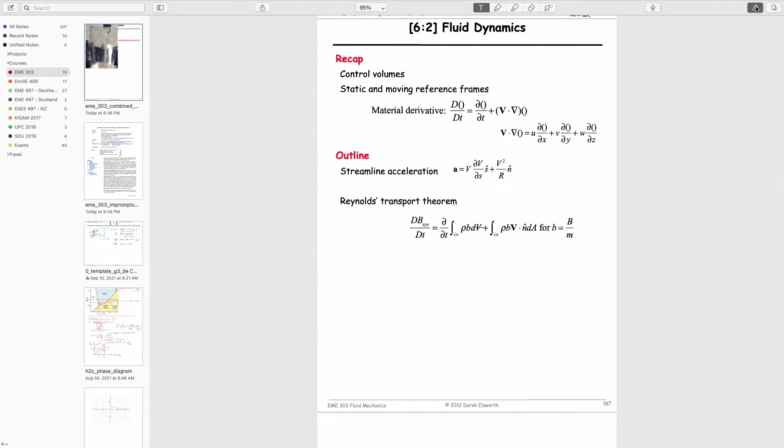Remember, we're talking about control volumes or conservation laws for mass, momentum, and energy, kinetic energy, in successive weeks. We'll look at different ways we can evaluate how long it takes to fill a glass, basically. Quite rudimentary, but it can be as complicated as I want to make it, and we'll make it a bit complicated because the principles we use for this we can apply also to conservation of momentum and conservation of energy. Conservation of momentum is important for things like wind turbines - you're transferring momentum from the air to rotational motion of the blade on a spindle and transforming it into energy. So it's important for machines, transfer of momentum. That's kind of where we're going. So enough chatting, let's get down to what we want to talk about today.

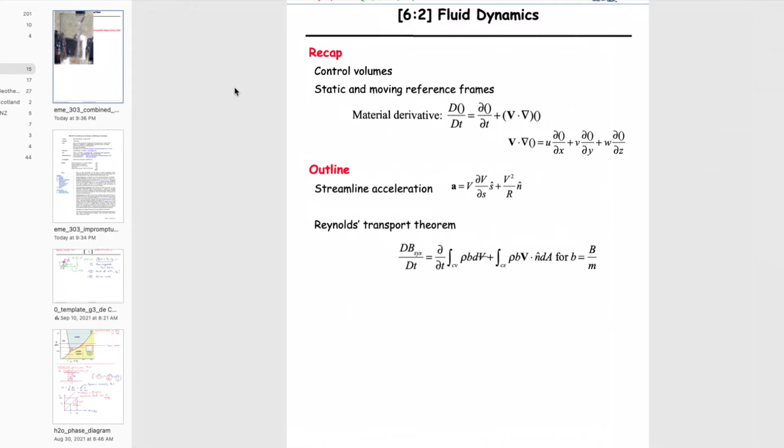We'll start with our usual discussion of what we've come from. So what have we talked about? You remember we talked about control volumes - we'll talk about those a little later today, so I won't reintroduce that now. But I guess the most important thing we talked about was static and moving reference frames.

I think the background for that is just that we can write Newton's law, F equals m dv/dt, where v is for velocity, not volume. We can write that, by splitting this out as we found last time, as rate of change of velocity with time, plus rate of change of velocity with x multiplied by dx by dt. This last term, if we write it together, is velocity Vx times dv/dx, which is actually the same - you can prove it yourself - as a half v squared over dx. These are exactly the same as each other.

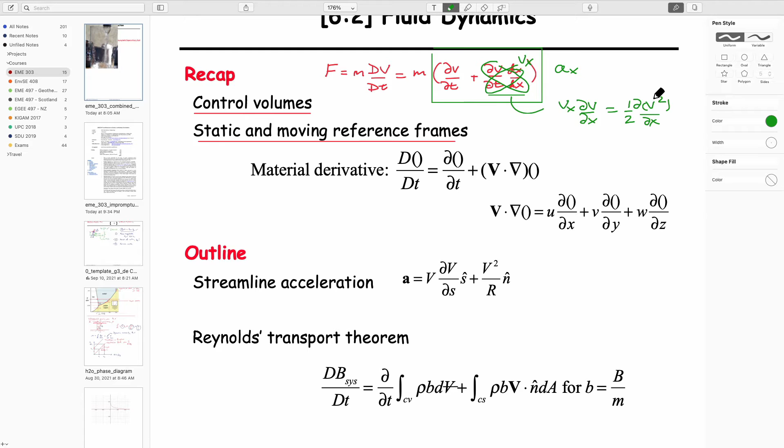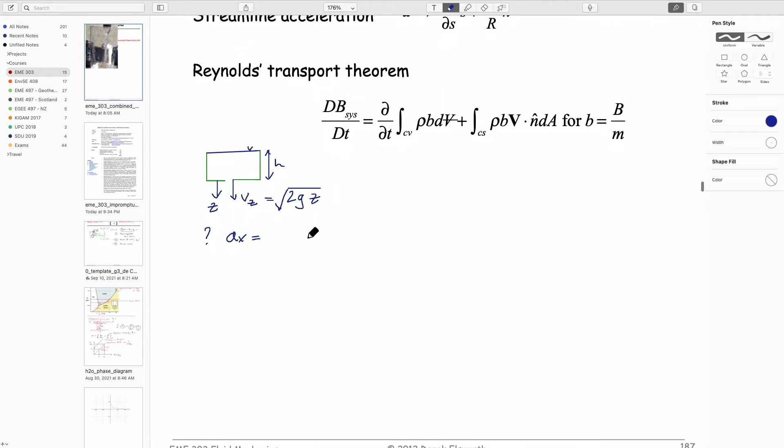But the best way to illustrate this is to think of something we talked about before: the equation of a free jet. We said that if we had water sitting in a tank, the velocity that free jet would come out as, Vz in this case, equals the square root of 2gh - but instead of h, let's call it z and write it downwards, so 2gz is how far we are down. If we look at the acceleration, we can define it exactly this way: velocity in the z direction multiplied by the rate of change of velocity in the z direction with z. That's just going to be square root of 2gz, this first part here.

Multiplied by the derivative of this, which is the square root of 2g, times the derivative of z to the half. And z to the half derivative is a half z to the minus half. So if you multiply these components out, square root 2g times square root 2g equals 2g for these two terms, and square root z times 1 over square root z times a half is just a half. So it's not surprising that it comes out to just be g.

Physically, all this is saying is that if we have a snapshot of this fluid coming out of the bottom, it will speed up as it goes down, just the same as if I drop this. So a packet of fluid behaves no differently than a solid in terms of Newton's law, and it will fall at the rate of gravity. If you were in that packet of fluid, you'd feel weightless, just as if you were flying through the air, like in a skydive. That's an interesting way to think about it.

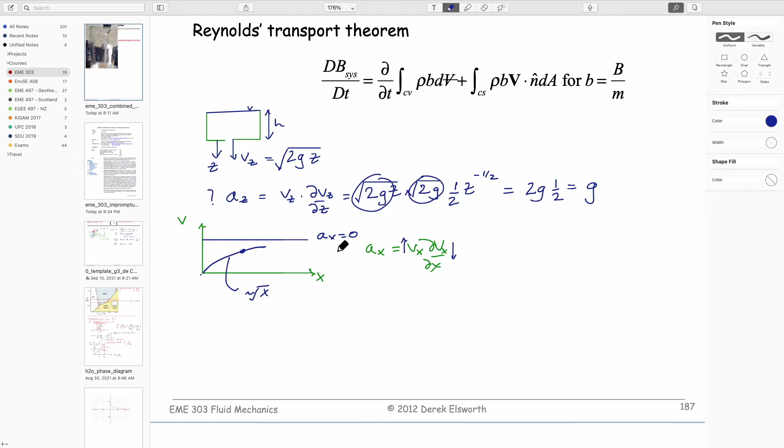So this would be my trajectory as I start off at the wall and go across. If Meredith follows me and does exactly the same change in velocity with time, this would be steady state. The meaning is that this velocity trajectory we see, if you take a snapshot now and take it again in 10 minutes, the curve is still the same. Someone else starting out 10 minutes later, then 20 minutes later, has exactly the same history—that's really the meaning of this substantial derivative. So that's where we're going with this, a recap from last time. It's important to understand that.

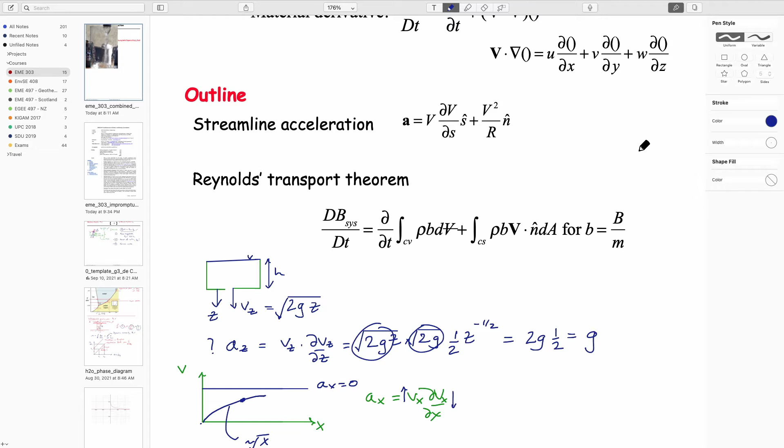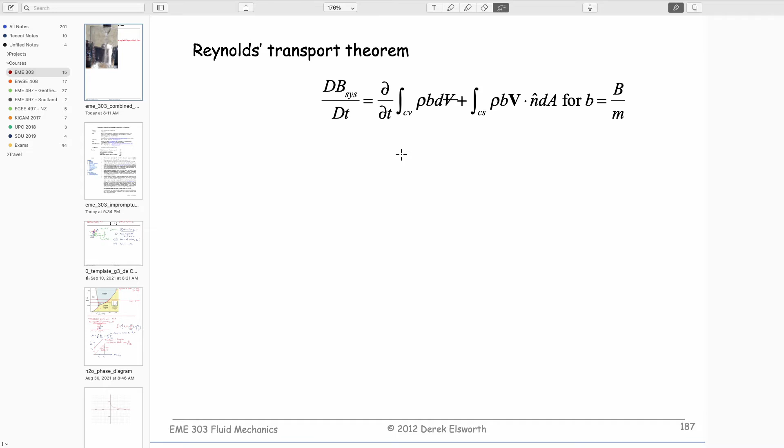The other thing we might want to look at are streamline accelerations. What's the best way to approach those? Let's see what comes out in the movie. So the other thing I'd like to look at today is streamline accelerations. The idea of this is this.

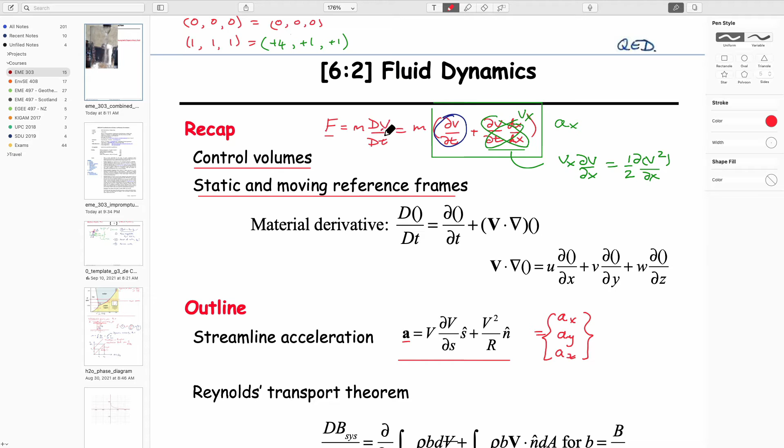If we wrote this out, this would actually be AX, AY, and AZ. You notice that this term is bolded—that means it's a vector, which has these components. We know that when we talk about Newton's law, this is a vector of forces, this is a vector of velocities that makes a vector of accelerations, because there are 3 components. That's the same case here. What exactly does this mean? Well, these terms look a bit familiar, right? This term certainly does.

Because we've talked about Newton's law as being equal to mass times v dv/ds, streamline velocity in this case. And we've also talked about Newton's law for rotation as being mass times v squared over radius. This is velocity, what we've called streamline velocity, I guess.

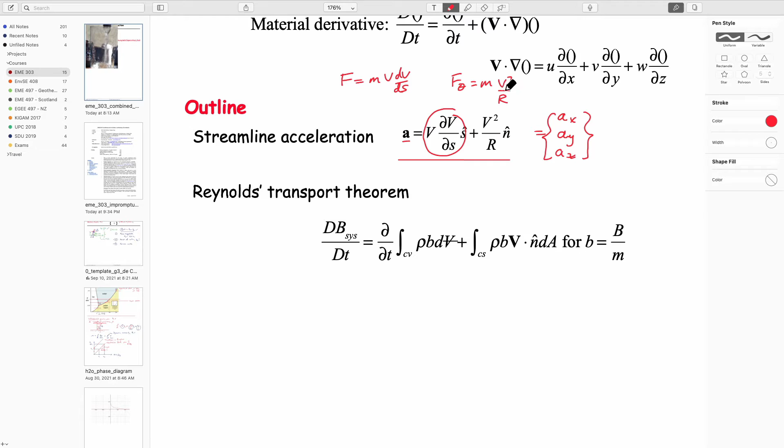Perhaps I should draw a figure - these are the two expressions that exist in Bernoulli for calculations along a streamline and across a streamline. We've talked about them exactly in this term.

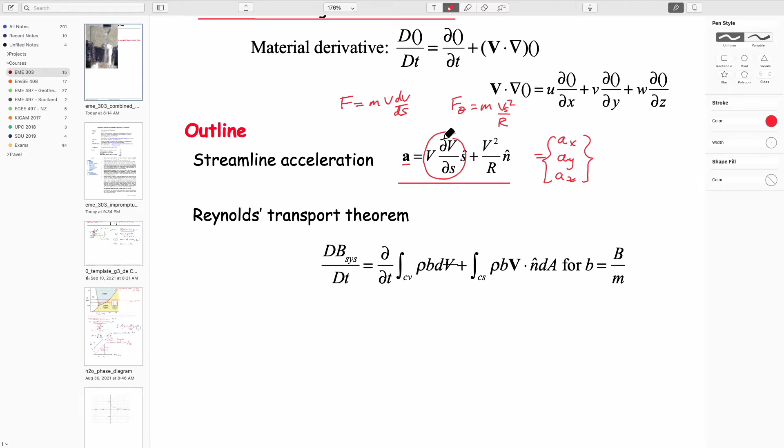So if I draw it here, let's see how well I can draw it. Didn't want to do that, wanted to have a curve. And so we have this idea of this.

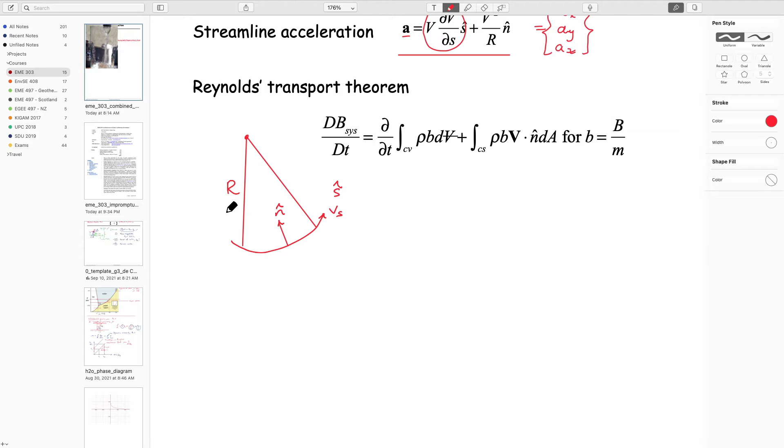So this is velocity along a streamline. This is what we call the streamline direction. This is what we call normal to the direction. Remember that this was acting positively into the center of rotation in the example that we gave. And these are the individual velocities of this system.

So what we can do is, it might be worthwhile thinking about exactly what this means. And what it means is that if we're looking at a particle of fluid that's here, then we can define that behavior as an acceleration in the x direction and an acceleration in the y direction.

The easiest way to do that is to basically draw a diagram that defines these two locations. So it would look something like - let's do it at 45 degrees. So this is our vector along the streamline. This is our vector normal to the streamline.

These are unit vectors. Unit vector means the length of this vector, which is defining the direction, has to be just 1. And so if that vector is 1, we'd like to be able to resolve the components that go along here.

So if this is 1 - actually, it's not 1 yet. Let's make this 1. And then by definition, this one becomes the square root of 1 squared plus 1 squared, so this one becomes the square root of 2. We want this one to be 1, so let's divide it by the square root of 2.

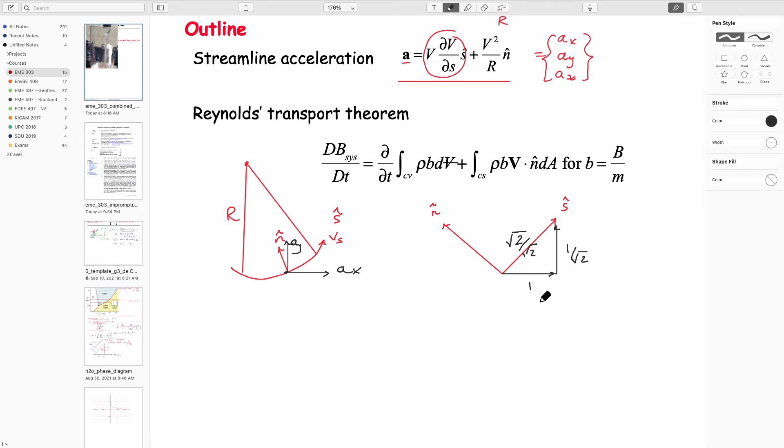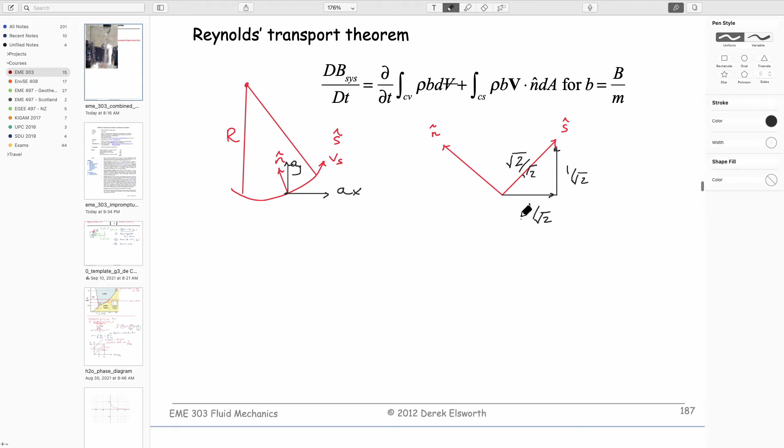So those are the relative lengths that we have that define this system. And so if we want to be able to define these components, we can say that the components - if we write this equation out in longhand, running out of space here - would be ax, ay, az.

Turns out that in this kind of, we talked about this x-y right-hand rule: x, y, z is coming out of the page towards me, towards you as well. There's a rotational one as well, which is a positive one - this is the z-axis, and this is the positive direction of rotation, which is kind of what we have here, just by happenstance.

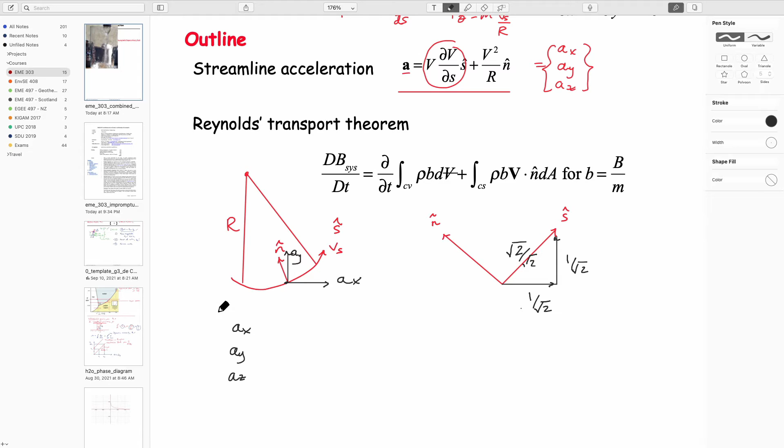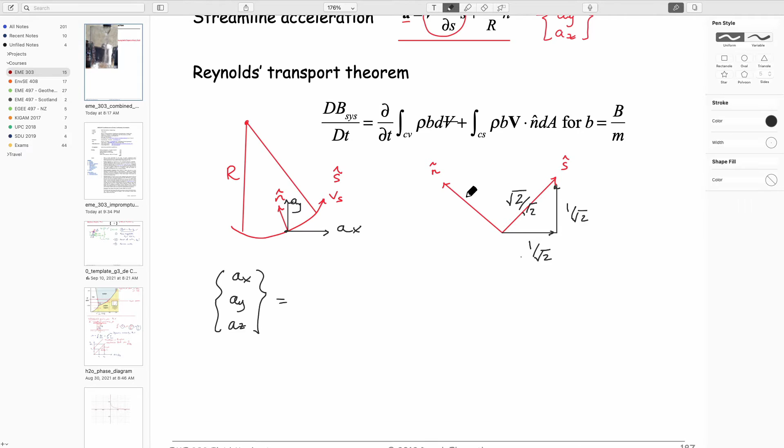If I work on these - I guess I'm spending more time doing this than I wanted to - this would be something like these terms here. So the streamline acceleration would be the velocity along the streamline times the rate of change of velocity along the streamline. So it's that behavior at exactly this point, multiplied through by this unit normal.

And the unit normal is going to be the components of this vector, s, in the ax and ay directions. So s in the x direction would be 1 over the square root of 2. And this would be positive 1 and positive 1. So 1, 1, and 0 is out of the page, so we don't care about that.

The acceleration normal to the streamline resolved into x and y coordinates would be v squared over r, again the streamline velocity, or what we've called before v theta, multiplied by this vector, which is the normal. This vector is this one, and if we do the same to this, it'll have the same dimensions.

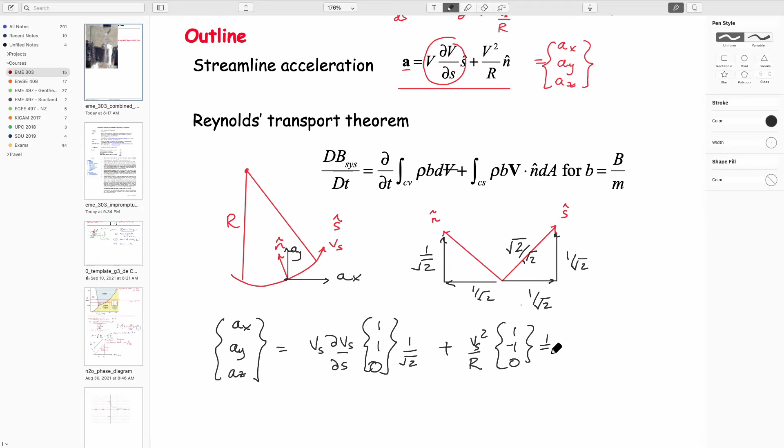This would be the x direction, which is minus 1 over square root 2. And this would be positive 1 over square root 2. So this is x, this is y, and this is 0. And again, multiplied by just 1 over square root 2. So that's physically all this expression means.

It allows us to, in the same way that before, take a velocity field by walking across the room and differentiate that to calculate what my acceleration was, or do it for the free jet, as we did. This is converting a velocity field which is in a streamline configuration into one that's resolved into x and y. That's all we did. And so it might be useful for us to do that at some stage, maybe.

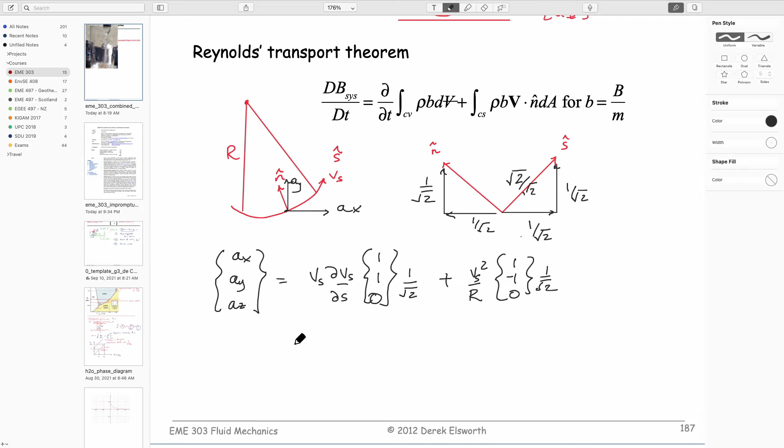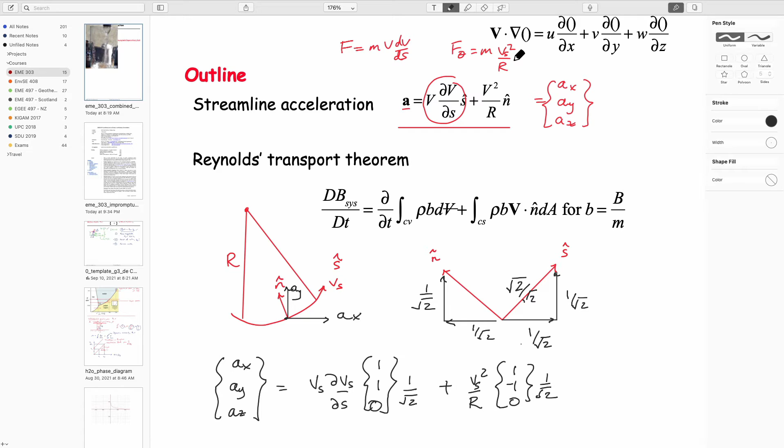So that was something that we are able to convert between coordinate systems. And of course, these two terms, you remember, are part of Newton's second law, linear and rotational. So that's it, that kind of finishes that.

So the next part is to talk about control volumes. We've talked a little bit about that already, and we'll go through a bit of pain that you should try to soak in generally, but won't have to use in full form. A bit of pain, I guess, is to understand exactly what Reynolds transport theorem is. Reynolds transport theorem is this expression here, and I'll try to explain it as straightforwardly as I can. But ultimately what we'll want to do is just use it in some kind of reduced form.

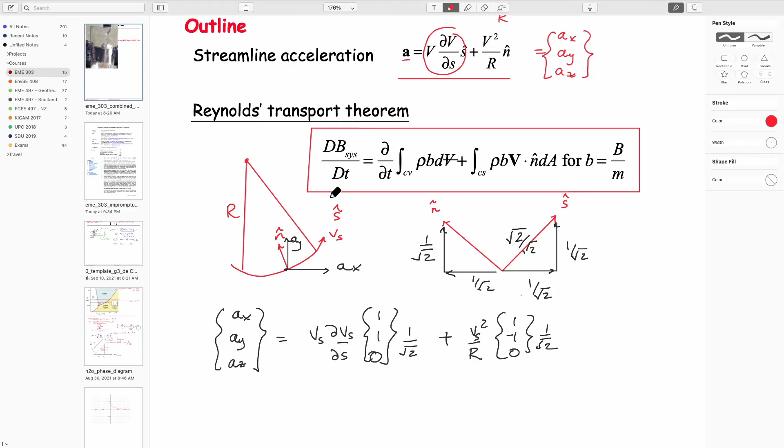But it's useful for us because of two things. One is that we talked before, and I guess I don't know if I have it here. So we've gone through all this. You'll be happy that we've just done this and this and this, and we're now here.

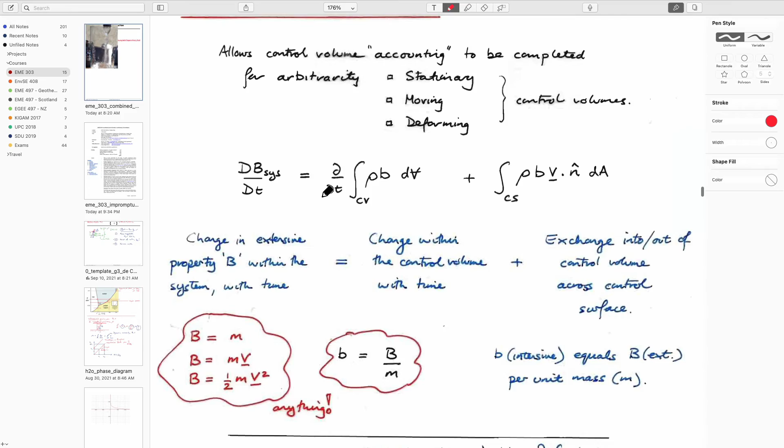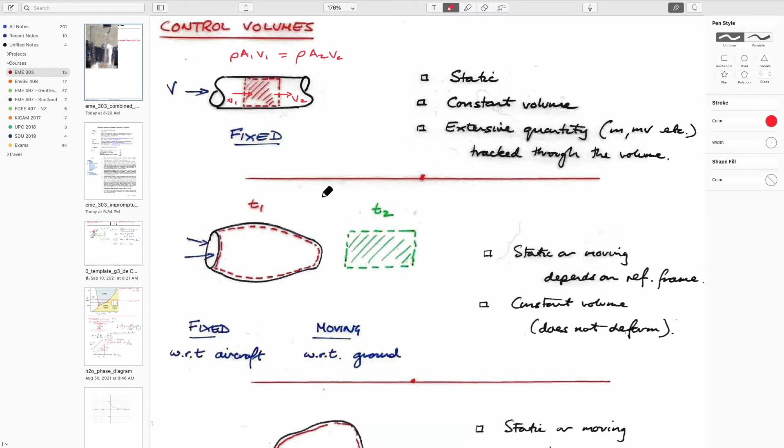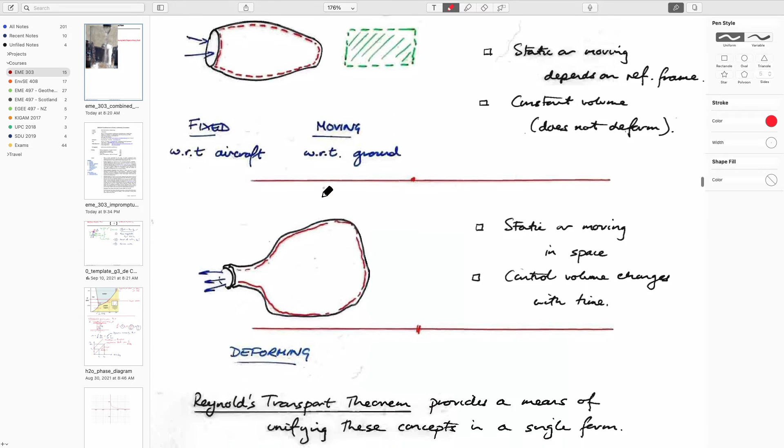So you remember before that we talked about reference frames. The reference frames we talked about were these little figures here: we can either have a static reference frame that doesn't deform, like a portion of a pipe. We could have a moving reference frame that doesn't deform but just translates, like a jet engine. Or we can have a whoopee cushion or a balloon that does both, it moves and it deforms at the same time. These may be useful concepts for us to include in our conservation equations, first for mass, then for momentum, and then for energy.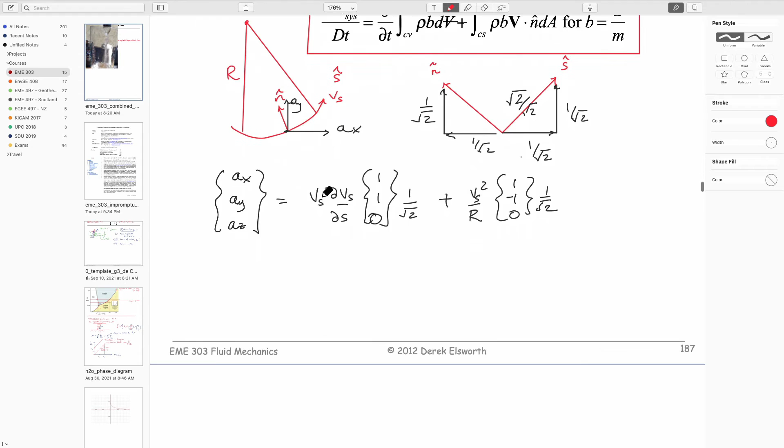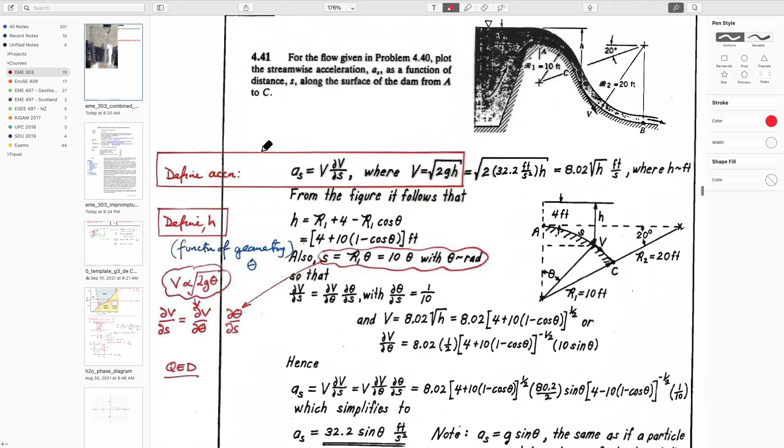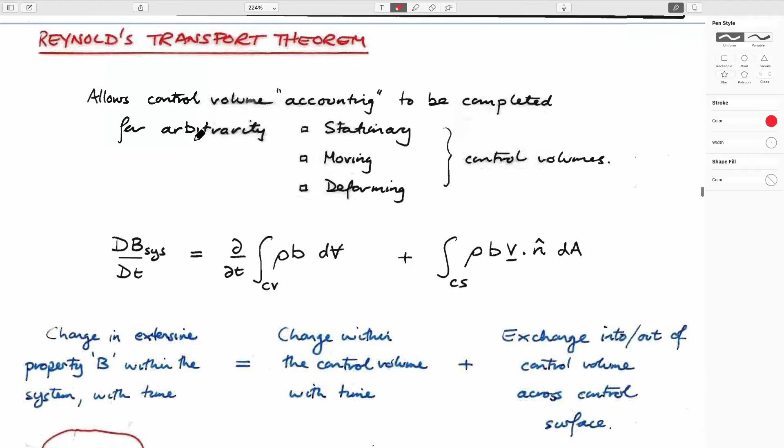So that's the first part. And I suppose the second part is that if we're putting conservation equations together, it might be nice if we can apply them not only for mass, but also use the same expressions to define the behavior for changes in momentum. And so to that end, Reynolds transport theorem allows us basically to do that.

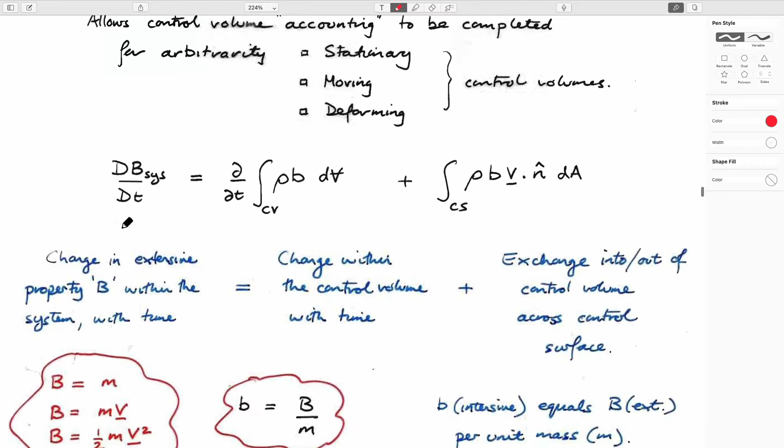And so it looks kind of complicated, but it's not. This says that the rate of change of some quantity is equal to the accumulation of that quantity plus the rate of that quantity coming in versus the rate of that quantity going out. So for mass, that means the rate at which water accumulates in our bucket is equal to the difference between the rate at which it comes in and the rate at which it goes out, and that has to equal zero. That's really what this equation says.

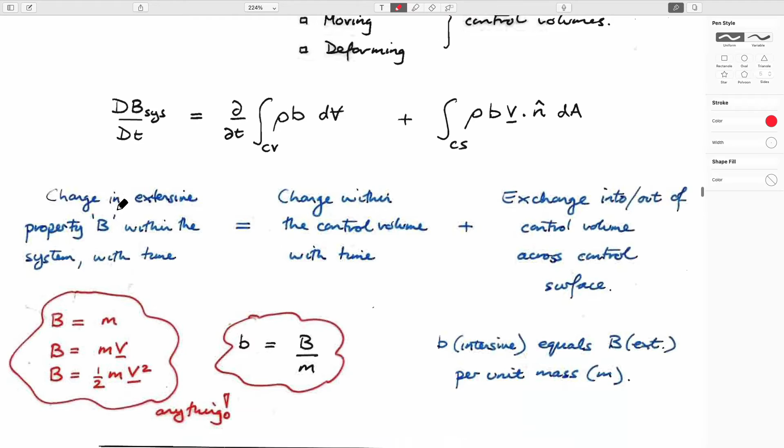And it's useful because it allows us to define this extensive quantity, which can be mass or momentum or kinetic energy. The value of this B, which is used here, is this quantity per unit mass. Because you work with the fluid, there's a quantity of fluid, and we normalize it with mass, typically. So B, for the case where our conserved quantity is mass, is just m over m, and is equal to 1.

So if we go ahead for mass - this is week number 6, this is us, this is week number 7, and this is week number 8: conservation of mass, momentum, and kinetic energy. For today, this term here is going to be equal to mass. This term here is going to be equal to mass divided by mass, which is just equal to 1. And this term here is also going to be equal to 1.

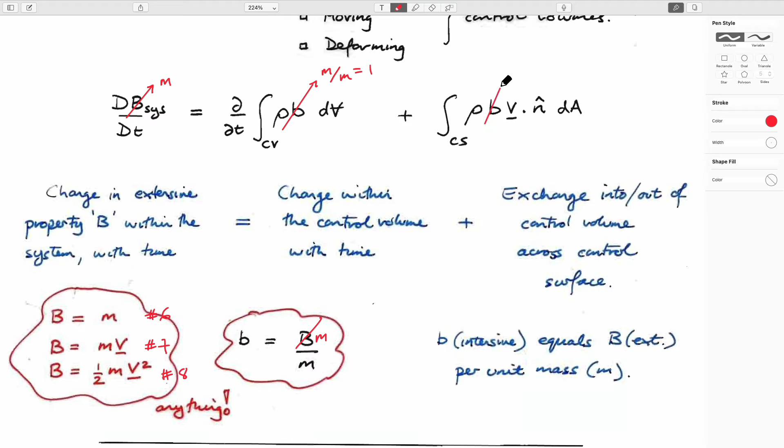And so this represents the accumulation of mass in the universe, if you like, the whole system. The net rate of change of mass in the big external system, even if it's going in or out of our control volume, this is always, for us, equal to 0. This term represents mass rate accumulation.

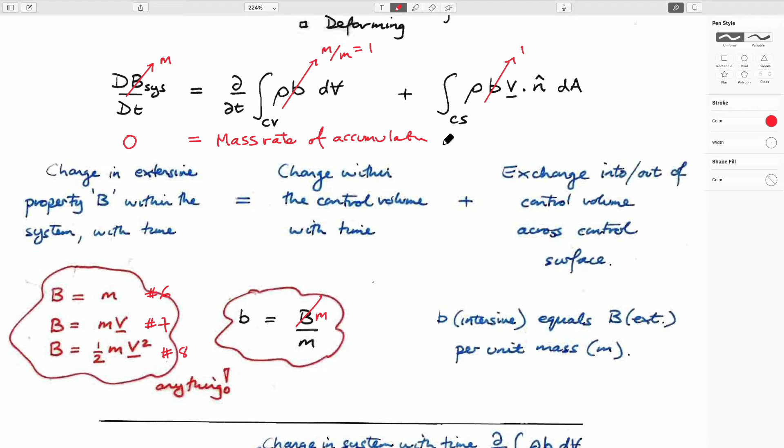In other words, I guess I could draw a little figure, probably easy to draw this. So this little figure has two important components: it has a control surface, CS, and a control volume. My handwriting's gone bad again. The interior of this - the contour is the control surface, the interior is the control volume.

And I think really, in general terms, what we're looking at is the fact that mass rate in equals mass rate out. And if those don't balance with each other, we net accumulate something in that volume. That's all this is saying. So mass rate of accumulation is how much accumulates, and it has to be the difference between mass rate out, I guess it's written underneath, minus mass rate in.

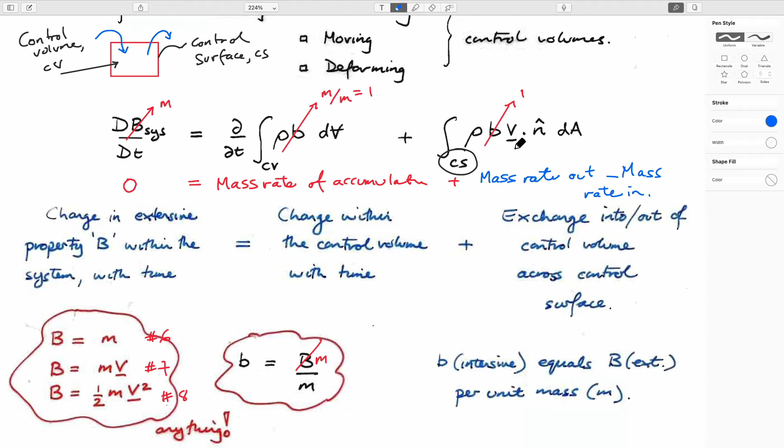And it looks kind of strange because it's an integral that's doing these things. So I don't want to go through... no, that's fine, that's enough. So let's go back and try and explain this.

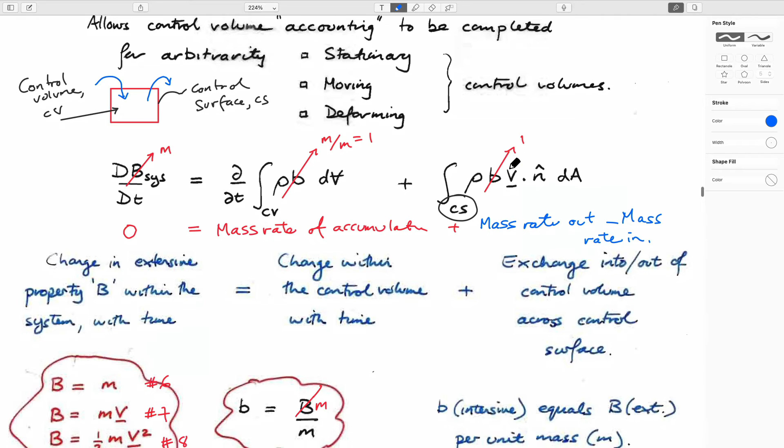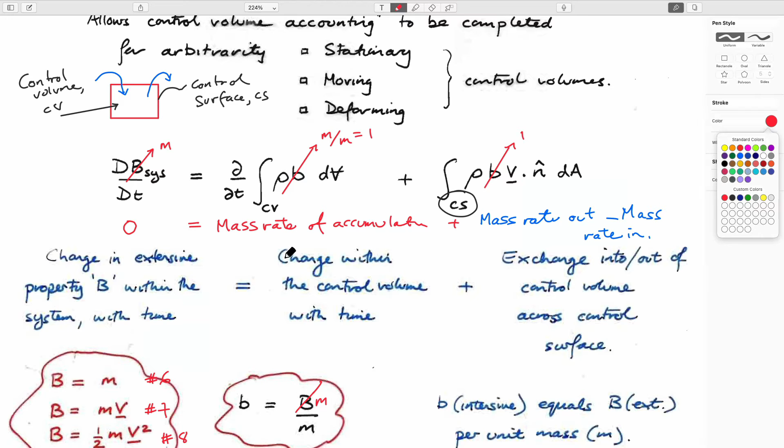So this is an important expression, but we'll write it maybe differently. Of course, remember this is equal to 1. Let's see if I can remember well enough to put it here. I guess I have it written right here. So we're going to write this expression as...

0 is equal, I'll just put it down so you can see it, to the integral over the control volume of density dV, this is volume, plus the integral over the control surface of density, this is velocity not volume, times the normal vector, dA, and it's all equal to 0.

So how else can we write this expression? Well, there's a much easier way to write it, or to explain it, and that is if we take this container, and we think about this container maybe having some vector normal.

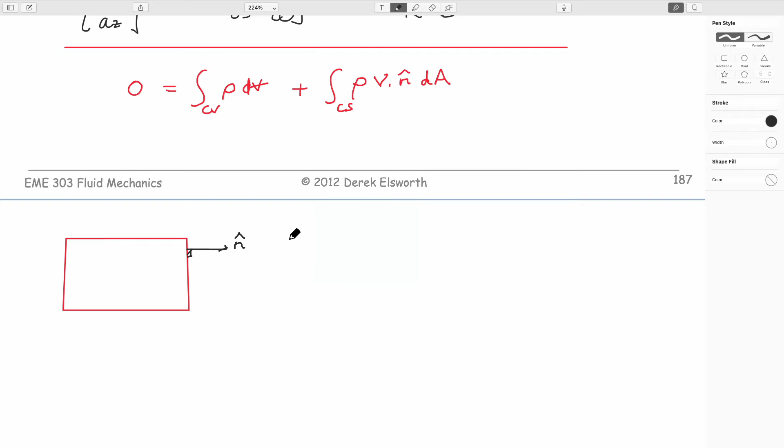So that's supposed to be a right angle. So this is the normal to the boundary, what we've called n hat in this equation. And everywhere it's normal to the boundary. So we can think about fluid flowing into this at some velocity v1 and maybe flowing out of it at some velocity v2. And maybe we can define the areas of this face it's flowing across as equal to A1 and A2.

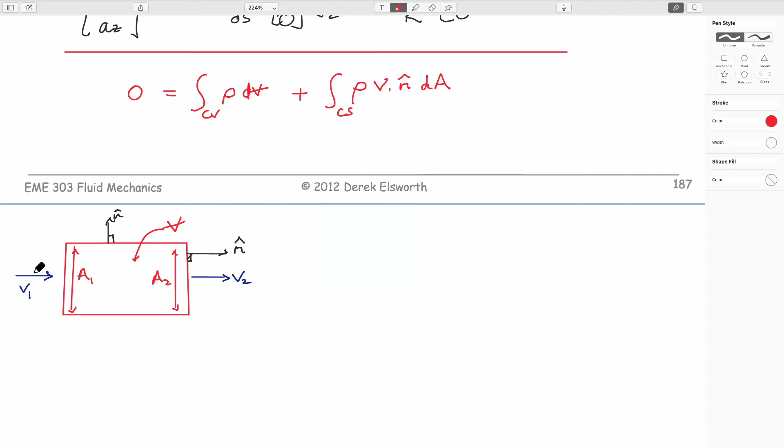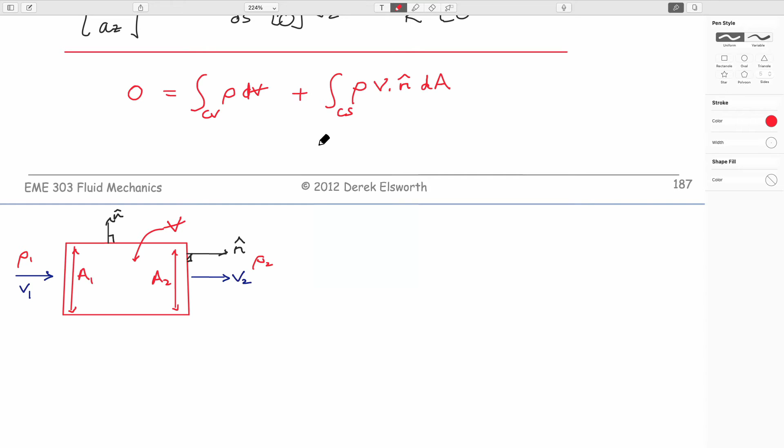Then we can start thinking about what these components are. So the other thing is that this will be of some volume, V bar, as you want to call it. And the fluid flowing through it has some density. And maybe that density changes, or maybe it doesn't. We could allow it to change, but we don't have to. So how would we define this kind of nasty looking expression?

Well, this we can merely, this is an integral, of course, is just a summation, right? You're adding things together. So this is just a product of density and volume. And so we could write this term out as an expression, and we're going to write it out as...

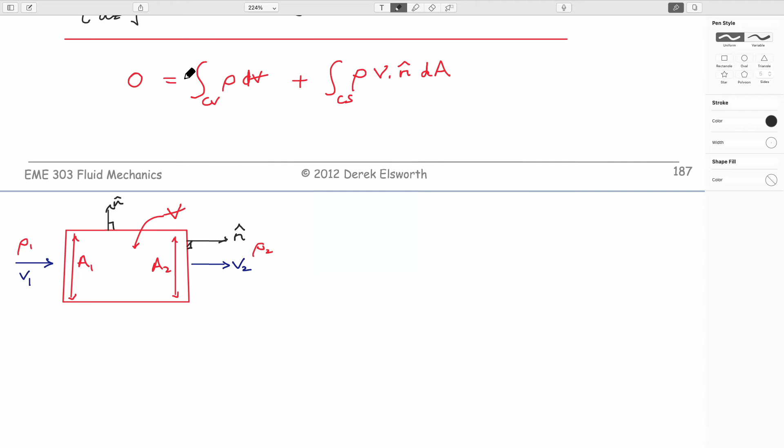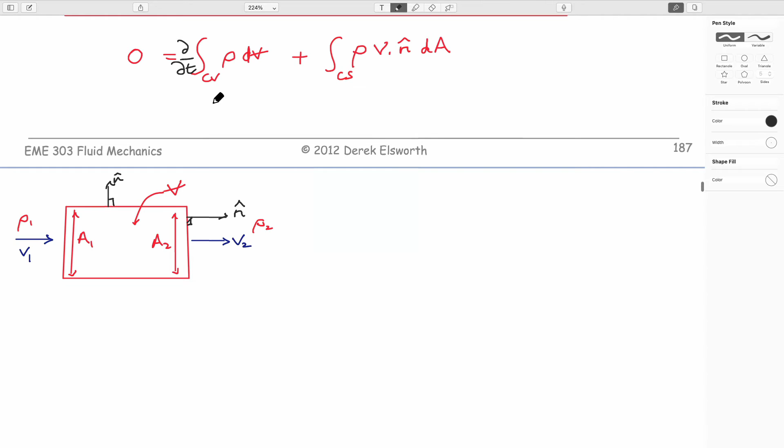rho... I missed out one of the terms. Let me get rid of that. Did I miss out a term? Of course, I was wondering why it didn't add up. Sorry, this is the term here, this term here. And so we could write out this component as rho dV, by differentiating it, just as the density multiplied by the rate of change of volume with time, by parts plus the volume multiplied by the rate of change of density with time. So this is this term rewritten out as a differential, plus the sum of...

density times normal to the boundary velocity, so this is velocity, times area. And so this term here, you know what a dot product is, right? In other words, we want to have a unique value for the velocity that comes out of here.

So if, for instance, the boundary looked like this and the flow across the boundary V2 was at an angle, what we want to do is resolve it so that there's a normal to the boundary component and a parallel to the boundary component. So this would be Vx, and this would be Vy or Vz, whichever. And we're only interested in this unique value because it goes across the boundary normal to it. This goes parallel to the boundary, so it doesn't cross it.

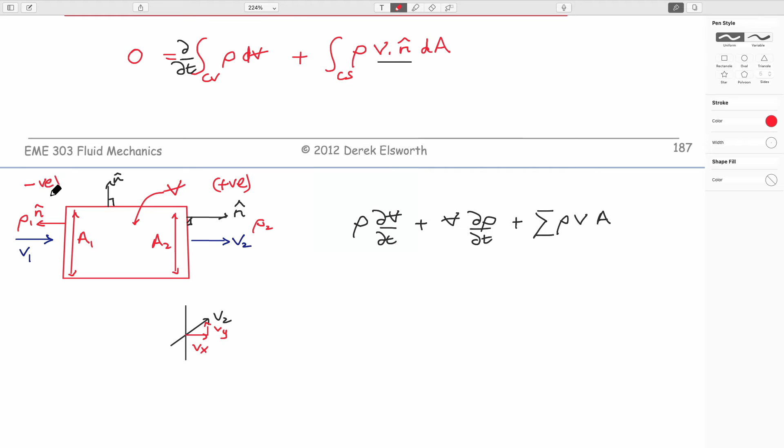And so what we want to do is take the dot product of the velocity coming out of this with the normal to the boundary. And all you need to realize is that if the normal is in the same direction as the velocity, then that velocity is positive. And if the normal to the boundary is in the opposite direction of the velocity, then this is a negative velocity. And so that accounts for the fact that, as we said before, when we write this out in longhand, it's a mass rate out minus a mass rate in.

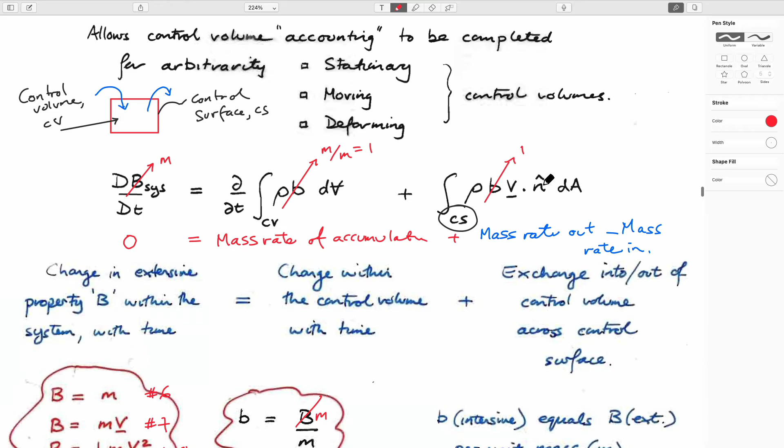This dot product takes care of this sign change in the summation. That's all it does. You'll never have to do a problem that isn't orthogonal, where you have to actually calculate a dot product. So all you need to know is that the dot product is always positive if they're aligned, negative if they're unaligned, and it allows this summation to take on plus or minus depending on the directionality.

And so for this problem, all this would turn out to be is, what's the rate of change of the control volume with time? Well, the control volume is this boundary, and in this particular case, if we wanted to calculate it, then the rate of change of the control volume is 0 with time.

In this particular case, if the density of the fluid coming in and the density of the fluid going out are the same, so there's no change, then there's no change in density with time.

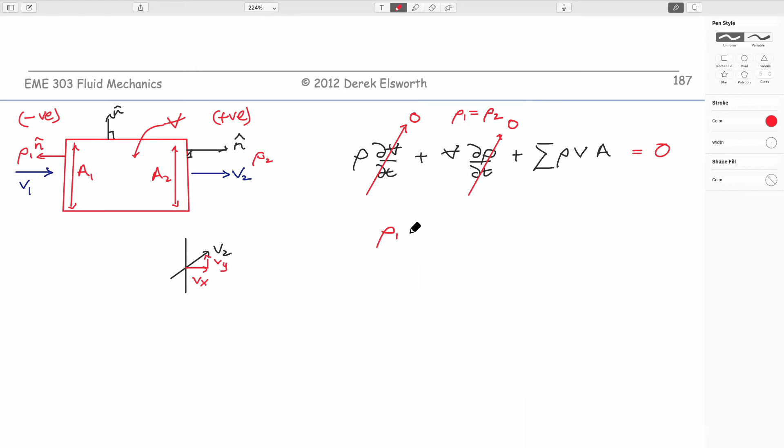And we're just left with this other term, which we can calculate as density 1 times velocity 1 times area 1. This velocity is in the opposite direction to this, so it's negative.

Plus the amount that's coming out of this side, and that is going to be the density 2, velocity 2, A2, and this velocity and the normal to the boundary are in the same direction. So this is positive.

This tells us basically that the velocity, if the areas are the same, then the velocity in has to equal the velocity out if the density is not changing and we're not accumulating fluid. So that's really what this expression means.

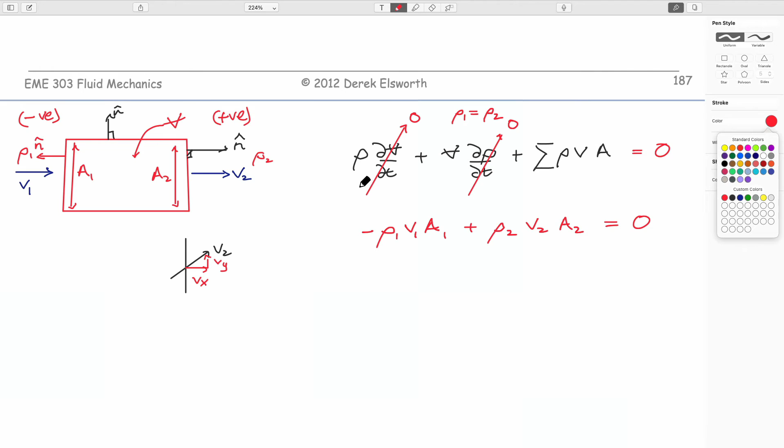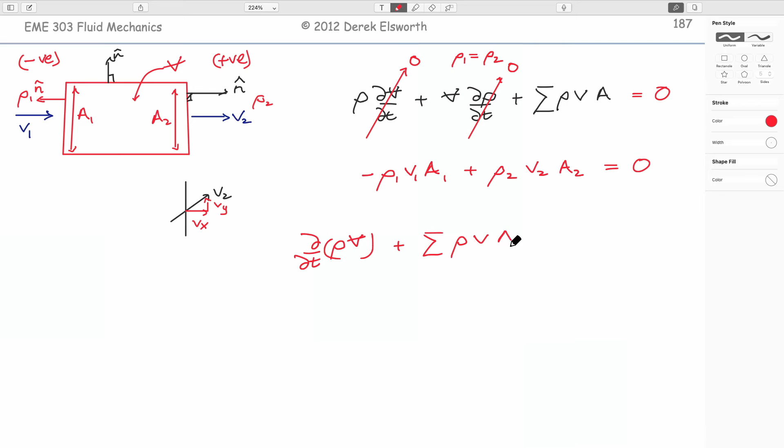So always, for everything we do in this class, this expression is going to suffice. All it comes from is the rate of change with time of density times volume—that's what these two terms are—plus the summation of density, velocity, and area, with the proper sign convention attached to that.

And we could do it for the others too, since if we wanted to, we could also add the other terms to this. There's no reason we couldn't, but I'm going to keep it there. If we wanted to, we could also do this.

So this plus this are 0. We could also add to this plus rho 3, V3, A3, plus rho 4, V4, A4 equals 0. And clearly the velocity coming out of this in the 3 direction and the velocity coming out of this in the 4 direction are, by our own definition, zeros.

And so we could account for those with the same sign convention: positive would be out, because it's in the same direction as the unit normal, and negative would be in. So that's the main expression. Reynolds transport theorem is fine—we'll use it again when we talk about conservation of momentum. This is the expression you need to understand. This term gets expanded into these components, and you can see exactly what we're doing from that.

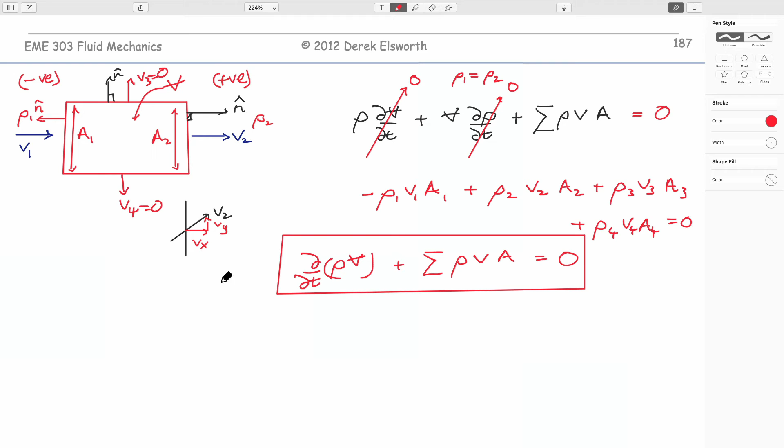All right, I was going to do something fancy with this. I think I still will do something fancy with this. I don't know where. So, oh, I didn't want—yeah, I guess it's just doing it on top of it.

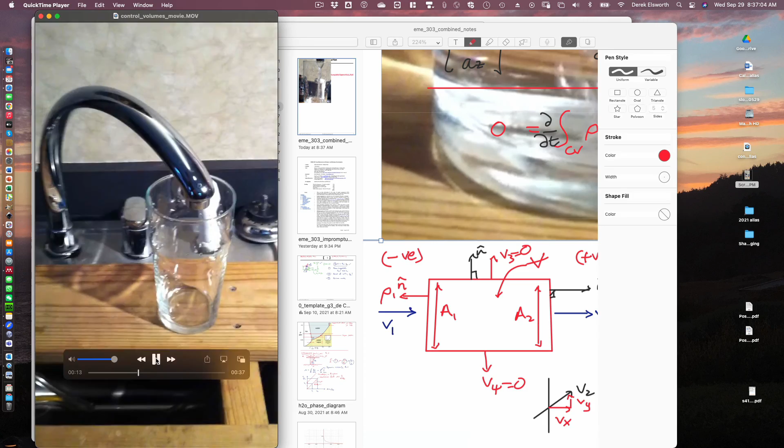So you remember this, right? This is something we've seen a number of times. The other thing I didn't mention, but I think is interesting, is that it's really quite a good test of continuity, because if you look at this when it's pouring...

If I freeze it, I guess I could just run it. Seemed like it was better then. You notice actually quite well, right, that it's much wider here.

So the area of flow is large here, and it necks down as it gets to the bottom. We know that it starts at some velocity at the top, it's accelerating due to gravity, so it has to be going at a higher velocity at the bottom. So continuity, as we've written it before, means that the cross-sectional area times the velocity has to be equivalent on a stream tube. This is just a stream tube—wide at the top, narrow at the bottom—which just means it's going faster as it goes to the bottom. That's the one point I was going to make.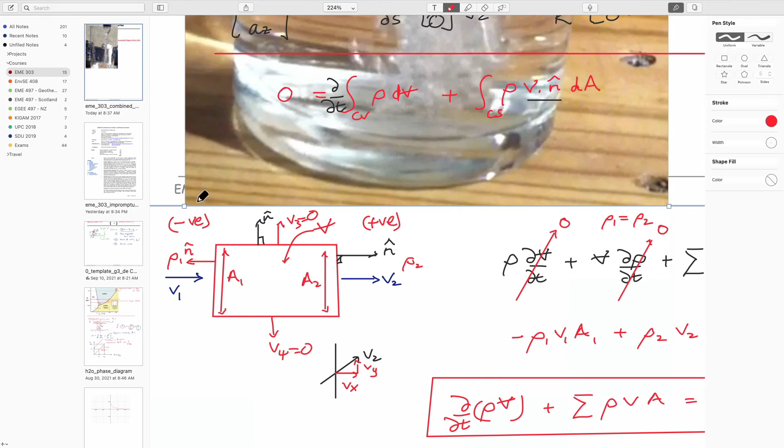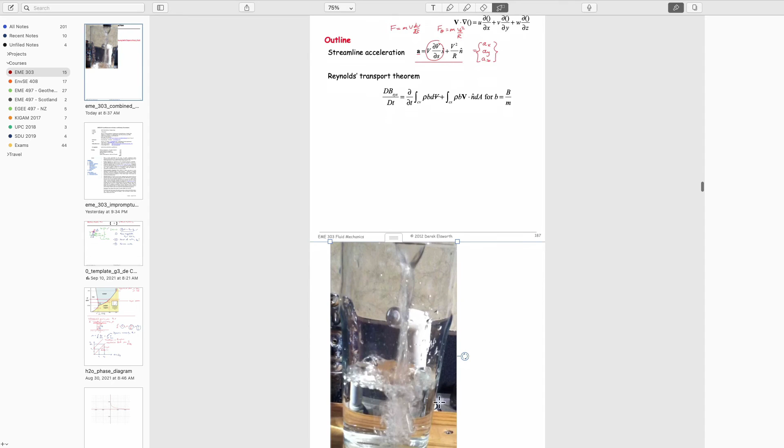So I was going to play around with this. Let's see if I can do that. I'm going to try, and I think I'm going to be too clever for my own good here, but we'll see if it works out. I guess I could make it smaller. Here's the idea, see if I can get by with doing this. I don't want to do that. Bear with me while I work on my skills. There you go. I want to use it on this page here. Yeah, perfect. All right, so this is what I'm going to do.

So we talked about this idea of control volumes.

So we had these three different kinds of control volumes. Here we have this picture. I could draw a control volume around here. I guess I might want to use a heavier pen. Can you see that? Adjusting, maybe.

So we could think of this as a control volume, and this could be a static control volume. If that was the case, what I want to be able to do is take this area here, where fluid is coming in at some velocity. And for this control volume, as I fill this beaker, it would also be moving up the level of the fluid as it rises.

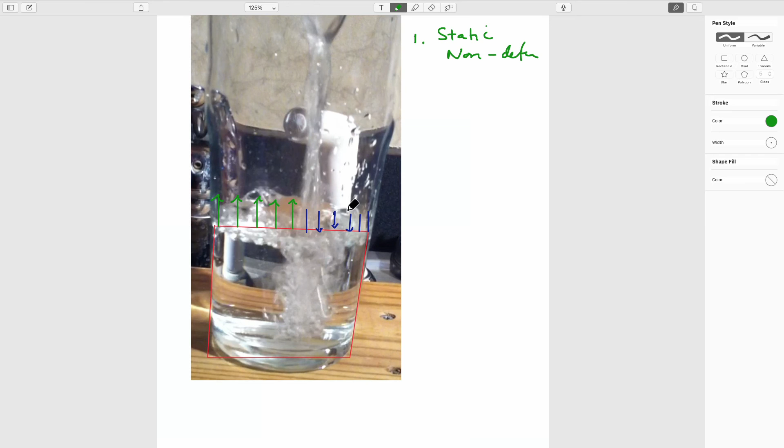So you could think of the first control volume as static and non-deforming, which is really what we've just drawn. And what I could do is look at the rate at which fluid is coming in, look at the rate at which fluid is going out, and balance it in the same way we used those previous equations. So that's one way for us to look at that.

Let's see if that comes off. Actually, let me do this. I don't want to do that. Okay, I'm learning my lesson. I need to do a good job of erasing this.

So what was the second form of one? It was our jet engine, right? So the jet engine was non-deforming but moving. So what would that be? Well, we'd start out with our initial control volume, which would be here.

And actually, I'm going to use this, see if it will work. We could use it to define a new control volume, which would be, getting too clever for my own good, this. So in other words, if you imagine the red control volume moving up and becoming the blue volume, just translating vertically upwards. I guess I am getting too clever for my own good here.

Then physically, if this is moving up at some velocity here, I want it to do this. Why won't it stop drawing? Oh yeah, there it is. So in other words, this is physically moving up. Then what's going to happen? Well, same as before, there's water coming in through here, through this part.

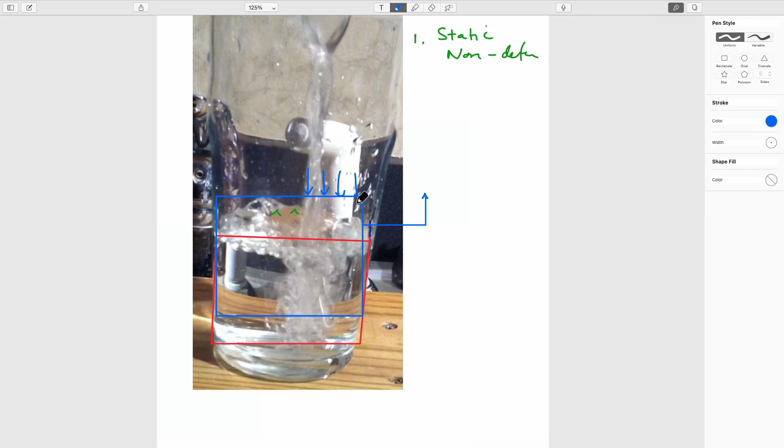The water that is moving out of the system is the water that's moving out of here. Even though the water is static, the control volume is moving past it. So the water, as far as the control volume moves, because your frame of reference is fixed to the control volume, the water is moving out past you. And of course, this surface here, the volume of fluid is zero because it's catching up with the free surface. So this is an example of our second one, the jet engine, which would be moving

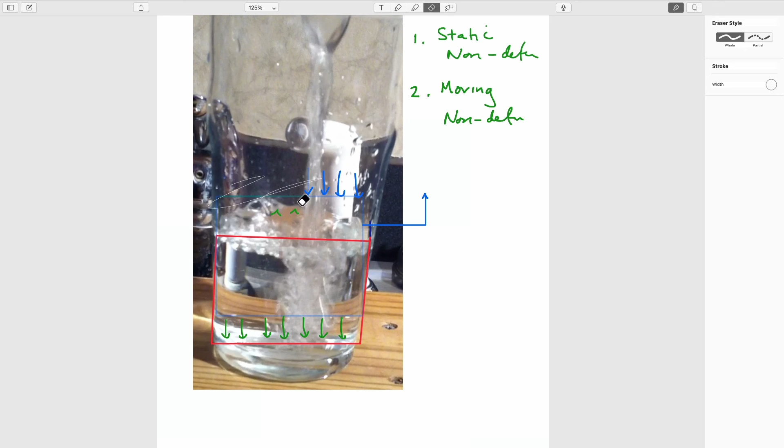and non-deforming, right? If you get it. And now I'm going to get rid of that again if I can. You get the picture. And the final one was our balloon, or our whoopee cushion, in doing that.

That was, it's easier for me just to draw these as boxes rather than do them as squares. So our first one looks like this. I know I've got some remnant green on the bottom, ignore that. So the third one is moving and deforming. So this was our pipe, if you remember, this was our jet engine, if you remember, and this was our balloon.

And so this one is going to look like, I'll do this, it's going to look like this, or could look like this. So now it's deforming because now it's bigger than it was before. The top is going to accommodate the water that's coming in through the top. I'm just drawing it wider to show it doing that. It's traveling up, and so the fluid going across it, in terms of the green fluid, is nothing. In other words, there's no fluid going across this boundary, and there's no fluid going across this boundary either at the bottom.

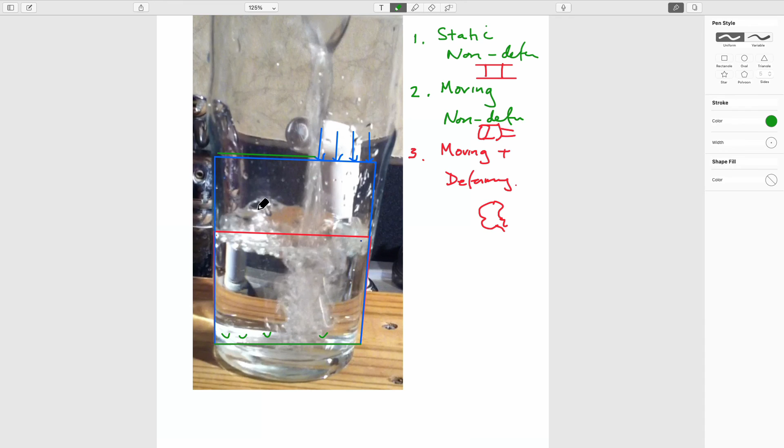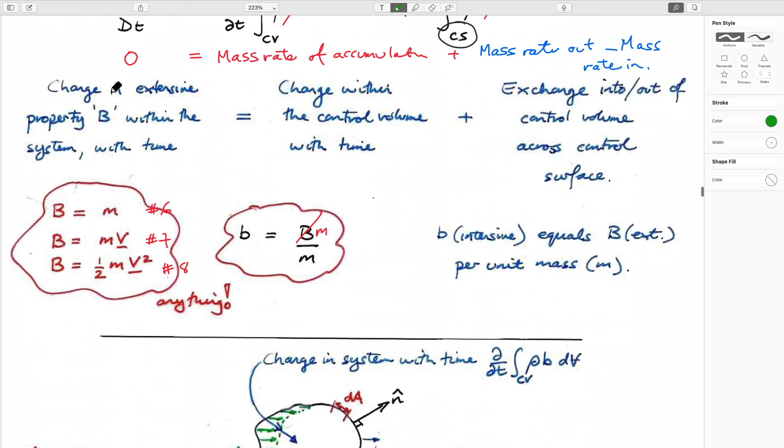The reason to do that, I was going to draw these, but I think I'll do them on the sheet instead, to come back to this. Let's do two very simple examples we can probably fit in before the end, which you can also see in the other movies—very simple systems.

Remember that we've defined our system as d rho dt times volume, plus dv, the change of volume with time, times density, plus the rate of sum of density times velocity times area equals zero, with our sign conventions.

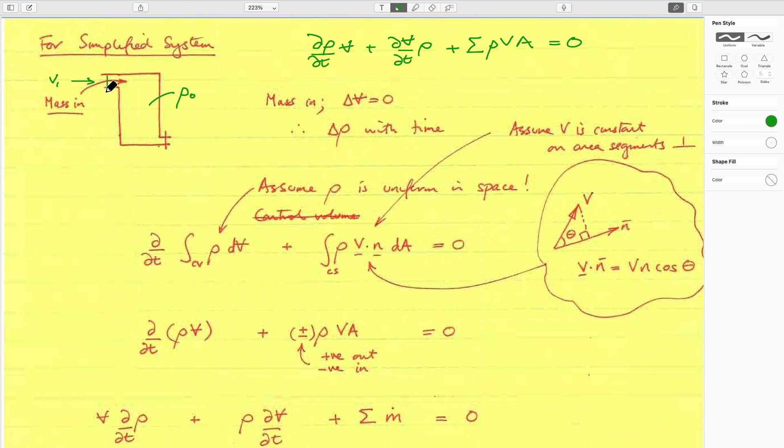So say we take a system like this and look at it. We cap it off, it's some volume. Let's say we start off with the density at time zero being a vacuum, for instance. We're putting in fluid at some velocity, V1, with a cross-sectional area equal to A1. What can we say about this system?

The control volume we'll put around here—I could draw it as a dashed line, but you can see it. The control surface defines the control volume, and that's not changing with time, so that's zero. The volume is finite, and the density presumably changes. It's like pumping up a tire: you're putting air in, the pressure goes up as you put more mass in, and that pressure is some measurement of the density because of the ideal gas law.

So this expression would look at the rate of change of density with time times a constant volume, plus the velocity of fluid going in, the cross-sectional area it's going in, and the density of it going in, equals zero. This is going in, so the unit outward normal is in the opposite direction, right? So this is equal to a minus—let me put that in—so this is minus V here. These are equivalent to each other.

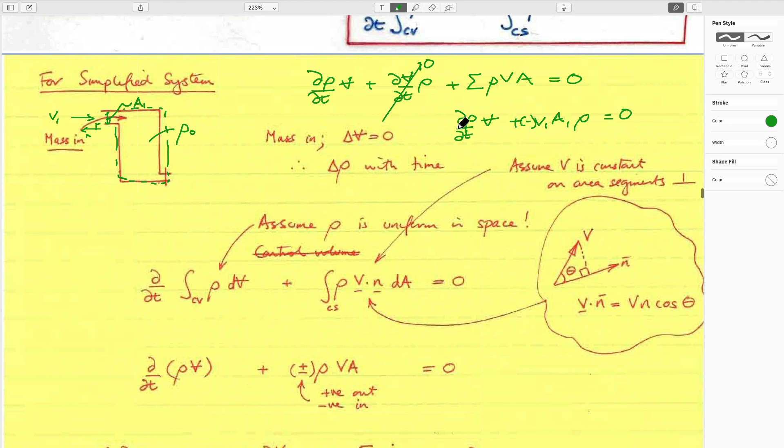So we can solve that for the unknowns in the system. If we wanted to solve it, we could look at the expression down here and solve for the unknowns. The unknown would be how the density changes as a function of time, just by integrating this expression to solve it, very straightforwardly.

A corollary to that would be to look at the case where—well, I guess it's done down here. So those are the equations that do it, and to solve it, these are the expressions we just looked at. This is the one we drew at the top of the page. So what would you do? You'd rearrange it to take the time off to the left-hand side.

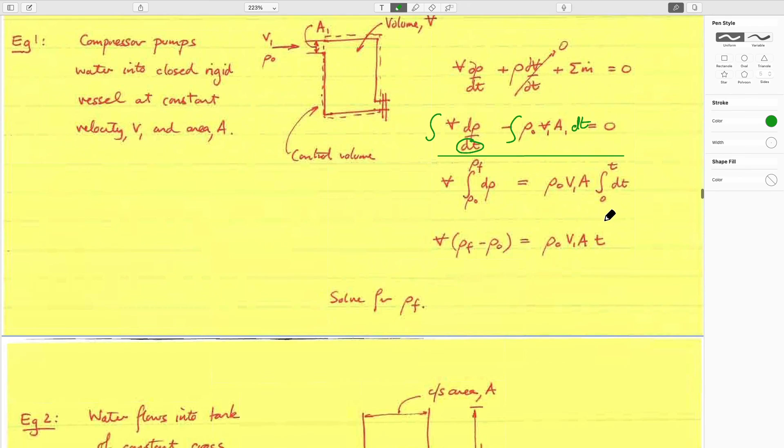You'd integrate both sides. The integral for this term would be equal to integrating between the initial density and the final density in your tire at the end of the time period. This would be the time. You'd assume maybe that the density can be defined as a constant here, or if not, you'd have to do it in a slightly more complicated way. You could calculate these integrals. This integral is just the time that's elapsed. This integral here, between these limits, is the density of the final system minus the initial density, multiplied by the volume, and the unknown would be the final density.

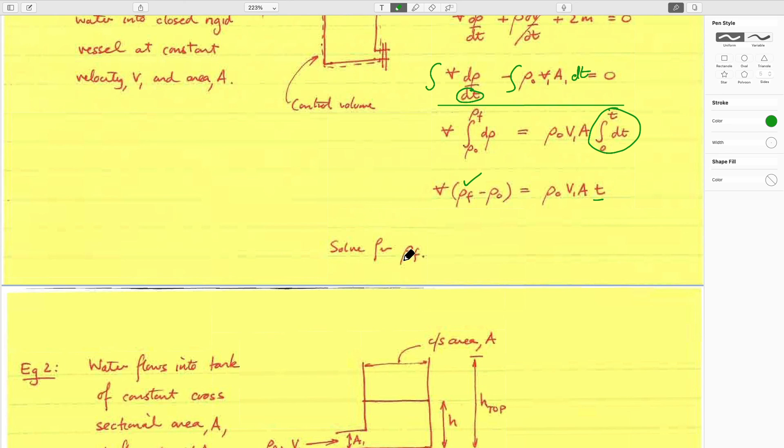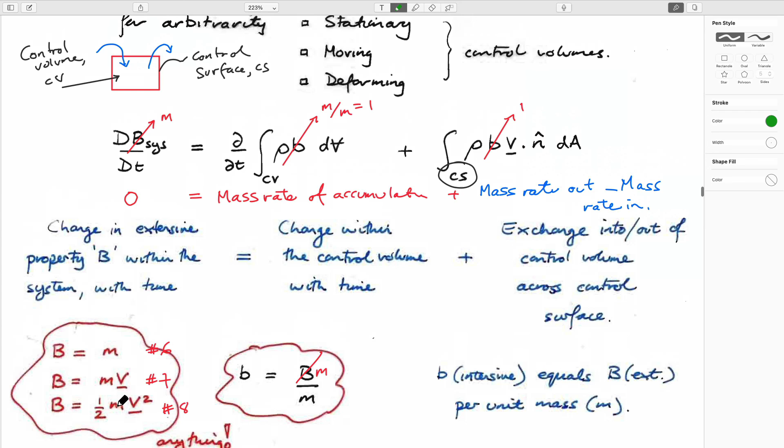So it looks like a complicated system in terms of the equation we have. It's necessarily that way because this equation can be applied to all three of these systems. The way we'll typically use it is in a much reduced form, this form, and so long as we can figure out exactly what the individual components are, we're able to solve it.

So what we'll do next time, since we're right at time, is look at the three different control volume types we had for the beaker: one that's static and non-deforming, one that's moving and non-deforming, the jet engine, and one that's moving and deforming, the balloon. We'll try to solve a simple problem with the same answer: how long does it take to fill up a bucket? We'll do that using those three different concepts and show that they're basically all equivalent. So that's where we're going. Okay? Great, thanks very much.